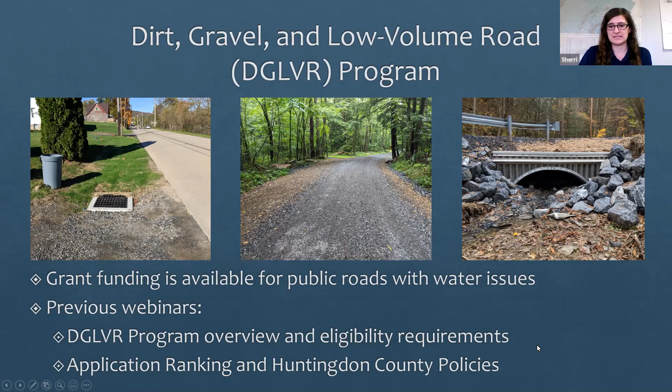To make sure you're eligible for the grant program, again, review that first webinar, basically to attend a training for that. And then eligible applicants will meet with the Conservation District to look at some specific roads and discuss some potential projects. Then applicants submit their application by June 30th of 2021. And then there are 2 separate boards over a couple of months that will rank all of the grant applications and decide which ones are funded each year.

If your project ranks high enough to be funded, you'll sign a contract in late 2021, do the road construction project in 2022, and be reimbursed after construction is completed in 2022. And then next year, you could also apply for another grant and just continue to enjoy your road. So that's the overall process. Since it's spring of 2021, we're in that pre-application phase right now. So again, today's webinar will be talking about specifically how to design road projects and then fill out the grant application. So I want to start with just a brief overview of what the application includes.

Thankfully, it's just 1 short page, front and back. The back of the page is a space to do a sketch of your project. You do have to attach a location map, as well as a cost estimate, which you sometimes can fit on the 1 page, but most folks like to use additional pages to write out the cost estimate with more detail. And a few additional forms that may be needed are a traffic count for the low traffic volume roads to verify they do have that low traffic, and a consent form from landowners for any work outside of the public road right of way. Later in the presentation, I'll go through all of these items in more detail, but just to get started, that's what the application looks like front and back.

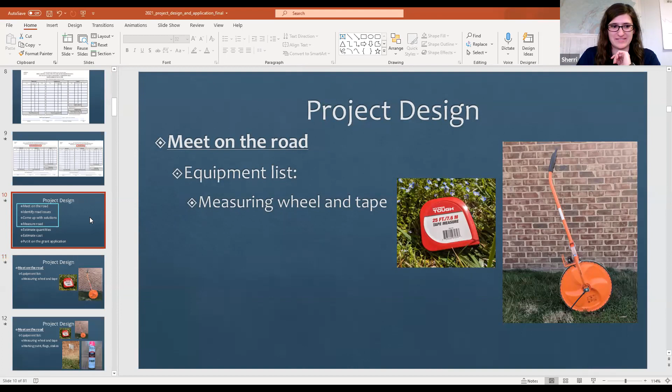Hey everybody, looks like we may have lost Sherri. I'm not sure what happened. If we had a power bump at the office. So just bear with us for a minute. I'm gonna see if we can get her back online. Oh, thank you for the text. Okay, looks like she's back. The internet just turned itself off and it came back on. So I apologize about that. Let's get my email off the screen there. Can you still see my presentation there, Selena? Nope, we don't see the presentation right now. Hit that button again. So sorry, everybody. I guess it was too much to ask to make it through 3 whole weeks without any technical glitches. How about now? Can you see that? Yeah, and I'm not sure where everybody else lost you, but go back. I would go back to the project design. That's where I lost you. Okay, I am sorry about that. We'll redo this slide. Selena, are we still recording? We are. I'll try to clip that out. No problem. All right, so

What I had hoped for you all to hear before was that if you're able to do a good job designing your road projects, it makes putting it on the grant application paperwork a whole lot easier. So this is really what I'm going to be talking about today. So when you're designing a road project, you obviously have to go look at the road, identify the issues on the road, come up with solutions for those problems, and take some measurements.

And I have those all boxed out because those are things I kind of do all at the same time, specifically when I meet with folks at pre-application meetings. Although anyone who has a background in road work or is just more familiar with the grant program can obviously do some of this work on your own. I know some folks like to kind of draft a grant application and then discuss it with me when we meet on the road, and that's fine as well.

Once you gather all that information, you can use it to estimate material quantities for your road project. Once you know what materials you need, you can get a cost estimate, and then putting all of that on the grant application becomes pretty easy. So we'll start at the top here. When we meet on the road, I have a list of equipment I like to take with me, starting with a wheel and a tape measure to make sure we can take measurements on the road.

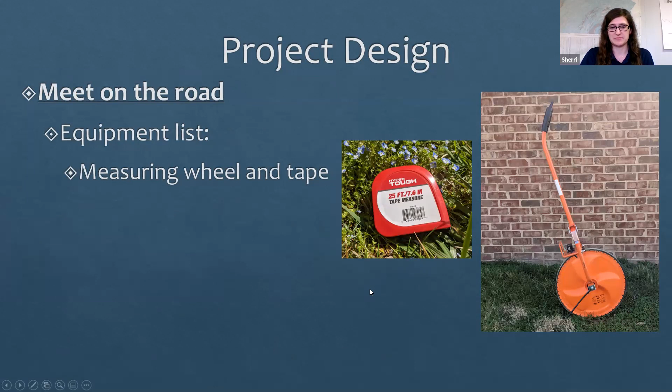I also like to bring along something like marking paint, flags, stakes. These aren't necessarily marks you would make on the road that would last all the way out until you do construction. But if you're going to be going back to the road a few different times as you lay out your project and come up with ideas, it can be useful to mark where you're going to install a new pipe or something like that, especially if you want to remember an area to talk to a landowner about, or me, or something like that.

Definitely have some way to take notes, like a pen, paper, and clipboard. That's the first step, honestly, in doing your grant application. Just taking some notes when you're looking at the road is the first step to putting all of your ideas down on paper, and it will be really helpful to have good notes from your meetings.

And there's also this little environmentally sensitive road maintenance field book. Folks will be attending an ESM training before applying for the grant, and everyone who attends that training will receive one of these booklets, either in person or in the mail, depending on if you attend in person or virtually. And they may be an underused resource, but they have a lot of really helpful information for laying out road projects.

And I don't have a picture of a camera here. I always take photos when I look at road projects, so I remember what they look like and can share those photos with the boards who rank and approve the funding for the projects. But you might want to take pictures in case it rains a lot and you want to see where it's flooding, or if there's groundwater seeping up on your road and it only does that a couple months out of the year. So you remember where things are at and what your road looks like, and that can help you in designing your road project or even talking to landowners.

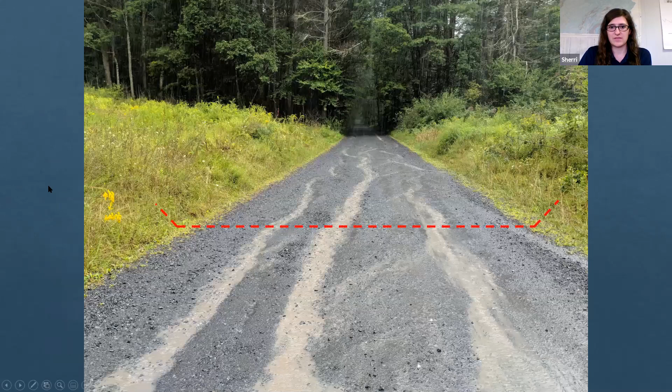I am getting a notification that my internet is unstable, so I hope I don't lose you all again here soon. Can everybody still see and hear me okay? Got a nod and a thumbs up, great.

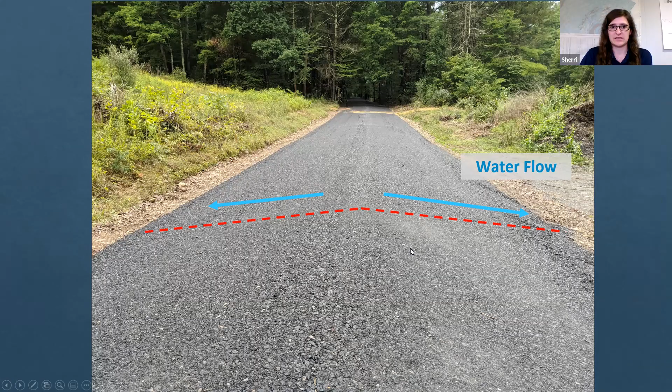Although if you don't have a good spot to build up your road and you just have like a little kind of artificial berm on the downhill side, I apologize, I didn't have a good photo of this, but anytime you plow your road or traffic goes by, some gravel can build up on the edge of the road. And sometimes that's all that's trapping the water on your road. So that's another thing to take notice of, because if you just remove that berm, that can have a similar effect as building up the road in certain circumstances.

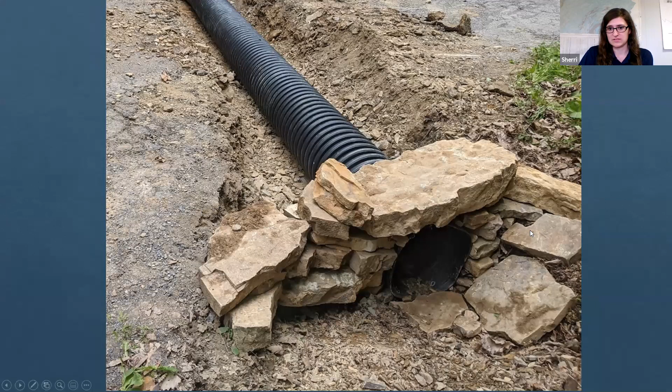If you don't have enough drainage or your pipes are failing, you want to be installing new pipes with some nice headwalls and endwalls like we see here. Underdrain is a great way to deal with groundwater.

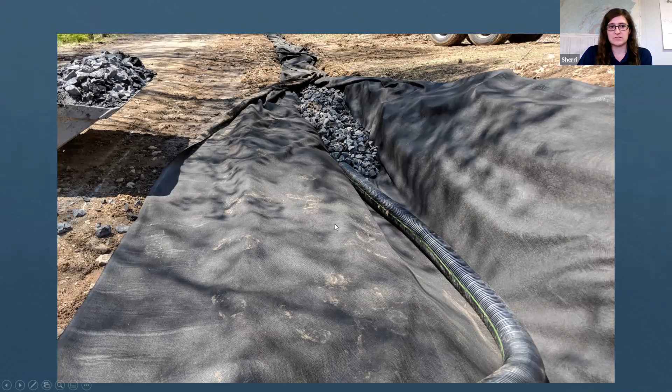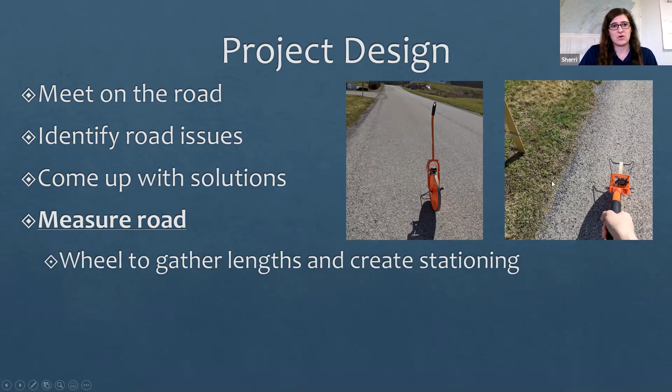Usually every 100 feet is how stationing goes. And then that way, when you're driving down the road, you don't have to start measuring from the one end every time. You can just start at station 2 and know that you're already 200 feet into the project.

This is often written as, instead of 0 feet, 0+00, or instead of 100 feet, 1+00. Because then when you go back and you're putting a pipe in, you know you can start at station 1 and go 20 feet from there. And then that's what 1+20 means, or 20 feet from station 1.

If your project's only 400 feet long, you may not need to do this. But if your project's 2,000 feet long, this can be a really useful way to break it up and remember where different features are going to be. So you can draw in every new pipe that you want to put in, existing features like a stream, where they're at in the length of that.

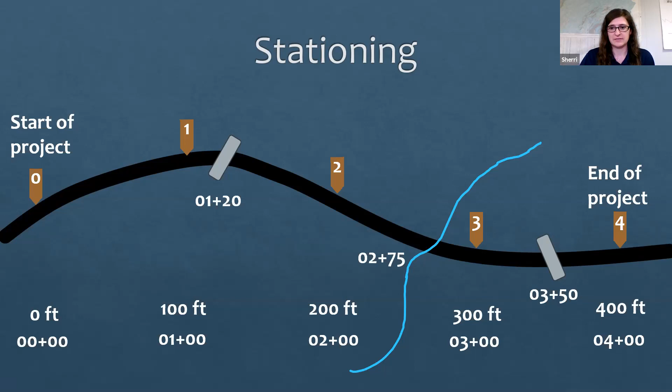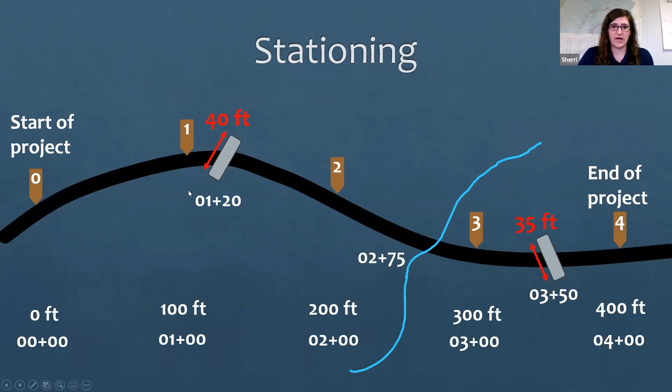Even if you don't want to do stationing, I always recommend a tape measure so we can figure out how big your existing pipes are and how long pipes are, because when you put them in on an angle on the road, you want to know how long they need to be to get across the road and outlet into a stable grassy area. So that's really helpful information, to know how long your pipes are going to be on your road.

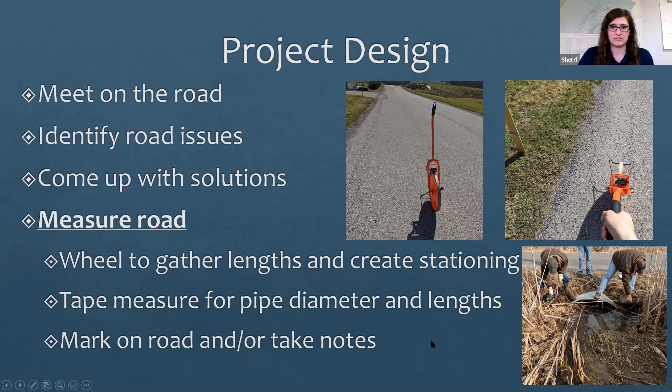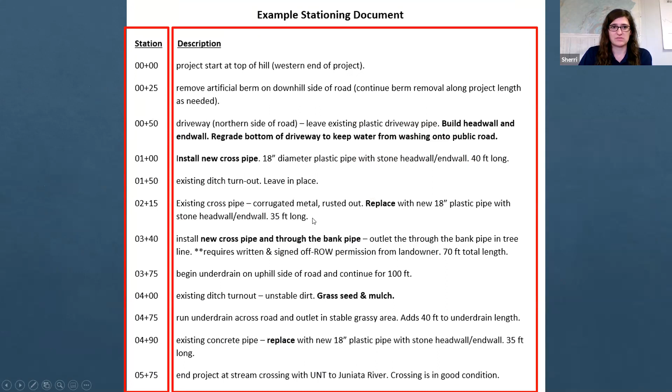And of course, take some notes, whether or not you put any stakes or flags or paint to mark anything. Again, taking notes at this stage when you're on the road talking about design will really help you out. What you can do with your notes is create a stationing document where if you have measured specific distances on your road, just write down, I was 200 feet from the beginning and we talked about putting in a new cross pipe. And when we measured the road, we need to get a pipe 35 feet long to get across the whole road. Just take notes in some way so you can reference that later.

And then when you're referencing those notes, you can use it to estimate your materials. So these are going to be based on those measurements you take out in the field when you're looking at your road, and it does require some math. If you don't like math, please do not panic, because I do have some tips to make this a lot easier on you. Again, if you're thinking right now, Sherri, I don't even know what materials I need to put a pipe in, let alone how to figure out how much I need, there are resources to help you. So don't be afraid to look at that book.

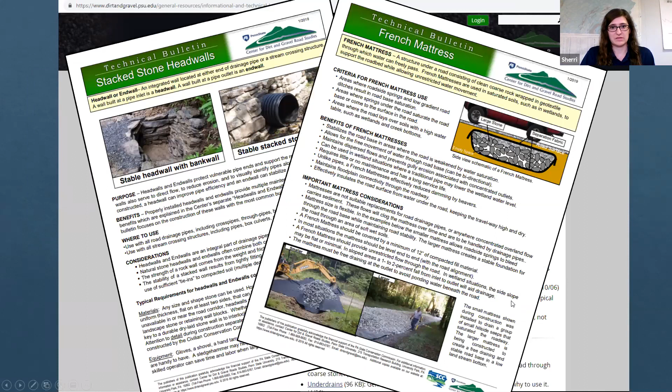And also, if you go back to that Center for Dirt and Gravel Road Studies website, they have a whole page on technical bulletins. Under general resources, it just says technical bulletins. And these are all 1 to 2 page explanations of what a pipe is, how to build it. What's the French mattress? How do you build it? What is driving surface aggregate or DSA? And how do you plan for it?

And so if you're struggling with that, these 1 to 2 page little technical bulletins can really give you a list of materials that you can work with when you're trying to figure out what you need to build your road. And honestly, I always have these printed out with me. When we meet, I'll probably give you a couple of these, depending on what we've talked about.

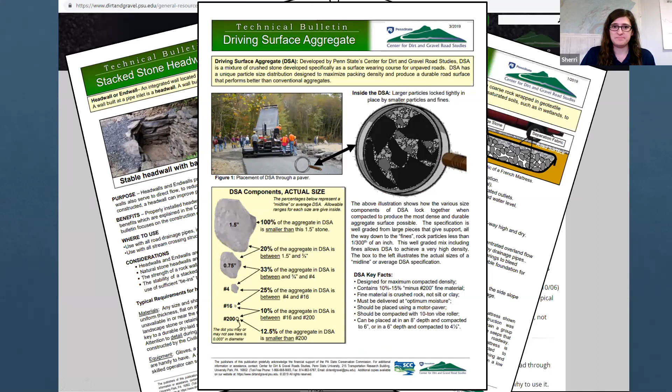So now you take your notes and you make a materials list. So if you want to figure out how many feet of cross pipe to buy, I go back to my list and I count up how many cross pipes we talked about. And hopefully you took notes on how long each cross pipe needs to be and you add it up. 40 feet plus 35 feet plus 35 feet. For this example project that I completely made up, you need 110 feet of 18-inch diameter smooth bore plastic pipe. That's kind of the standard folks use for road drainage.

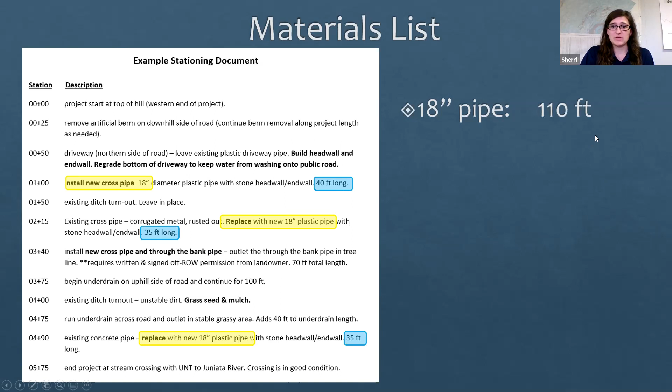But when you build a pipe, you need more than just the pipe itself, right? You saw in the photo, we build head walls and end walls out of stones very frequently. So you want to make sure you are buying stone to put around the ends of your pipe. And you do have to backfill those pipes with some fresh gravel, such as PennDOT 2A, to make sure that the road is stable and safe and that pipe doesn't collapse under the weight of traffic. And that's another thing that can be tricky.

How do you know how much stone you need to backfill a pipe? Well, thankfully, most components of roads, including the surface of a road, are really just a rectangle. So if you think about burying a pipe in the ground, you can just think of the trench you buried it in as a box around it. And if you figure out the volume of that box, you can estimate how much stone you need to fill it up. So that's just multiplying the length, the width, and the height, or the depth.

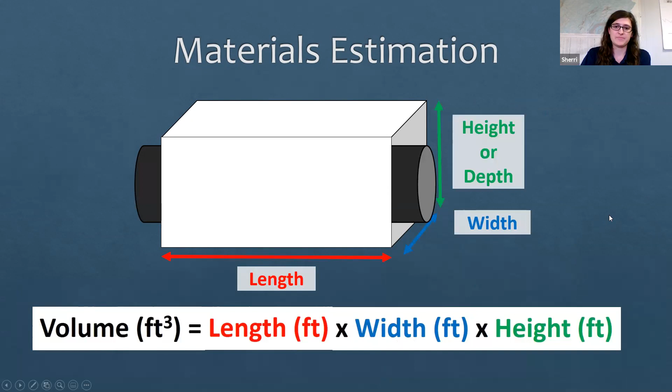So looking at a few pictures, if you already know that your pipe's going to be 40 feet long and 18 inches wide, just budget a little extra space on either side so you can compact it with a jumping jack or vibratory plate, something like that. Think about how deep you want to bury that pipe. Getting those numbers, you can calculate how much stone you need.

This doesn't have to be to the inch. Obviously, this is all an estimate. This can change a little bit by the time you actually go to construction. Once you start digging, you're never going to know exactly what depth your trench will be a whole year in advance. But just this way of thinking about it can really help you estimate that.

Now, another problem some of you may have noticed is that you don't typically buy cubic feet of stone. You might buy it by a cubic yard, but more often you're probably going to be buying stone by the ton. And so there are some simple calculations you can do by hand to convert that volume into a more usable number. But honestly, there's a much easier way than doing all of this by hand.

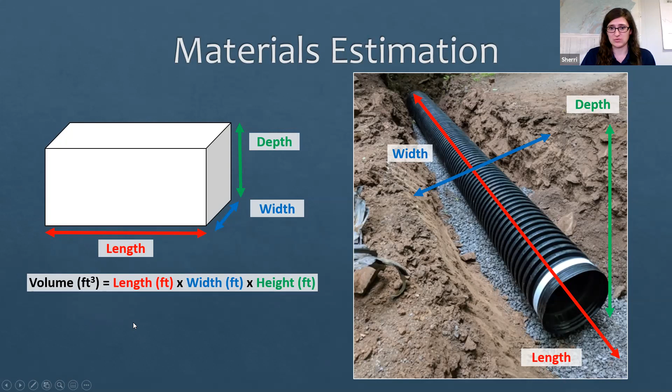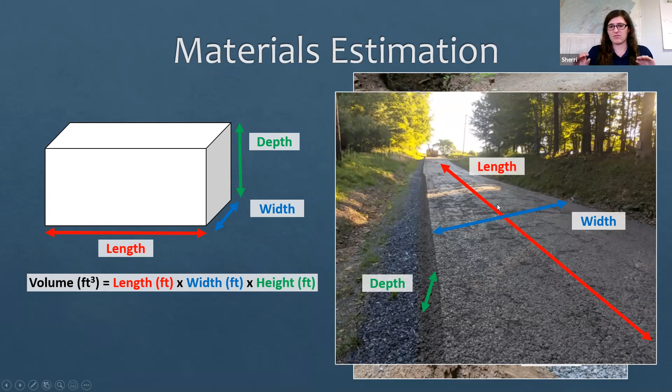Oh, there's another example. The surface of a road, when you're building up the road base or placing DSA, it's kind of the same thing. It's just a long, flat rectangle. So you need a length, a width, and a depth there as well. And so Penn State has a materials calculator on their website. You can find it in the same area of their website as the technical bulletin.

And so here's the web page. When you scroll down, there's honestly just boxes for length, width, and depth. If you have taken those measurements on your road, you just fill them in here. Pick what kind of stone you're talking about, hit this magic green button and it gives you answers. So if you have a 500-foot section of road, the driving surface is 16 feet wide, and you want to place 6 inches of DSA, it'll tell you exactly how many cubic yards and tons you need.

And if you happen to know how much you pay per ton for DSA and put that number in here, it even spits out that's going to cost you $6,111, and you can put that number directly into your grant application. So you can use this to estimate backfilling a pipe, an underdrain, a French mattress, building up a road base, driving surface aggregate. If you really just focus on those length, width, and depth measurements and use this tool, it'll help you out a lot.

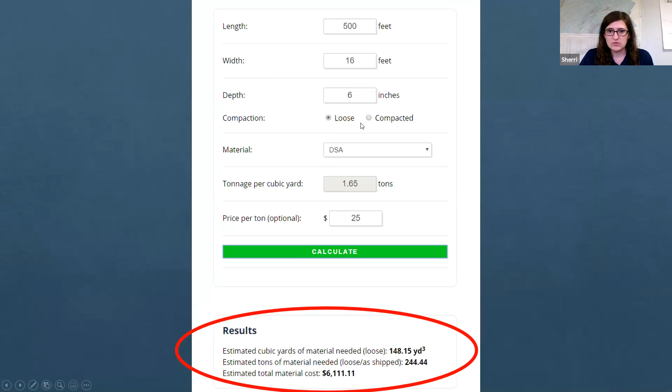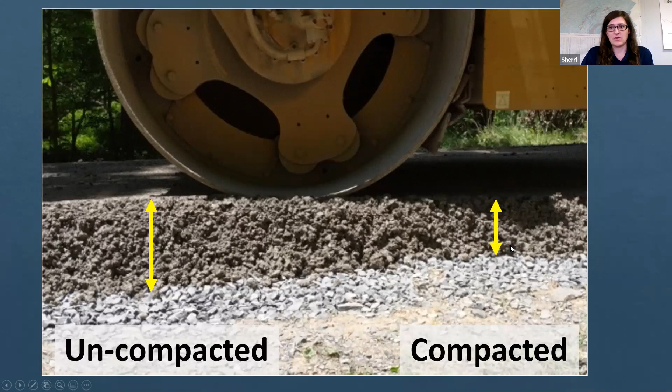You might have also noticed there's a loose or compacted option here. When you're putting in 2A, 2RC, DSA, any kind of aggregate around a pipe or on the surface of a road, it will compact, and you want it to compact because that will give your road strength and support traffic. So you just need to know if you want it to be 6 inches before you compact it or after you compact it, and make sure you're picking that option in the little calculator there.

So those are some considerations that can help you with materials estimation. What I would do is just go through all my notes and do that for every item. Figure out what materials you need for your pipes, for your underdrain, for your French mattress, for whatever it is you're building on your road. And that's how you can create a materials list.

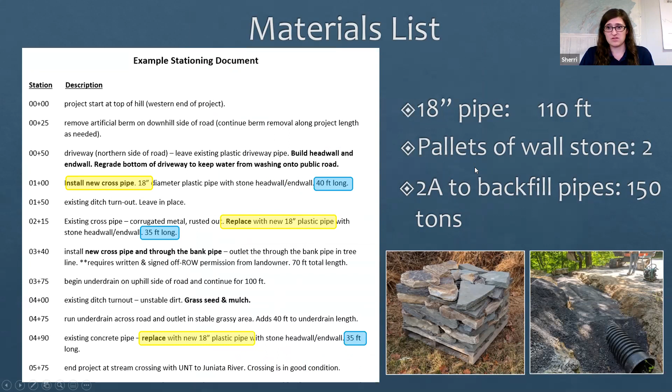Okay, so talking along then, estimating quantities is one of the hardest parts for people. And again, I'm available to help with that at the Conservation District. And once you have that, cost estimate isn't quite so difficult.

Unfortunately, that is an area that I can offer the least assistance with, just because I don't know how much you pay for things. I always recommend people use their past or current costs when they're buying stone or pipe or any materials, because you know best how much it costs. And you know if you have to pay for it to be delivered, or if you have to pay someone to drive your township truck, for example, over to pick up the material.

You know, quarries will deliver stone to municipal buildings or directly to a construction site. And any section of road you have materials delivered to will have a different delivery cost with it. And so at a certain point with the cost estimate, that's really up to the individual applicant to figure out how you plan to get materials onto your site, how you plan to get them installed, and figure out what works for you in the best way to have that happen.

If any of you are thinking, I don't buy that stuff, we don't do a lot of big road work, we'd have to hire a contractor, then I recommend you talk to a contractor at this point in your project design. You know, show them your notes, your stationing, take them out to the road and talk about what you want to do and say, how much would it cost for you to do this project? And make sure they understand that's different than a bid.

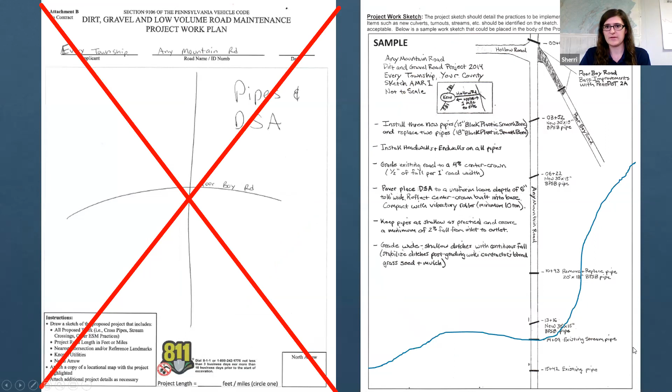Some tips on putting together a good sketch like this are to show the approximate location, shape, and size of the road. So if it's a straight road, draw a straight line. If it's a curvy road, draw it curvy. If the intersection is T-shaped, make it a T. And if it's not, just try to mimic something that's close to what it actually looks like. Draw in all of your project features so we know how many cross pipes or French mattresses or underdrains you're doing. And I know it's probably too small to read, but I'm sure you can tell there's words here.

If you're not an artist, please don't stress about this. You know, you can just draw a couple of straight lines and then write some notes. So this says that you're installing 3 new cross pipes and replacing 2 cross pipes. And you're saying what size those pipes are. Then you're saying you're installing headwalls and endwalls on all the pipes. You can actually just write some notes on there if that's helpful or easier for you.

So existing features like streams, landmarks can be really helpful. You know, if there's like a big tree in the middle of the road project, or there's only one mailbox, and that's where you're going to install a French mattress, just drawing something like that on there so I know, okay, there's 2 pipes on this side of the big tree and 3 pipes on that side. That can be really helpful too. And if you are going to be applying for grant money for anything outside the public road right of way, just show us which parts are in the public right of way and outside onto private property. That could be great as well.

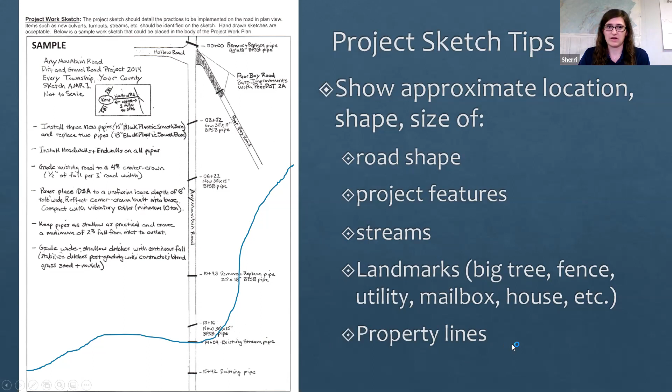Cost estimate, again, is probably one of the hardest parts for people. So I'm going to just briefly talk about how to fill out this additional form if you choose to use it. So zooming in on the materials list here, you've already made your materials list when planning your project. So now you just have to fill it in.

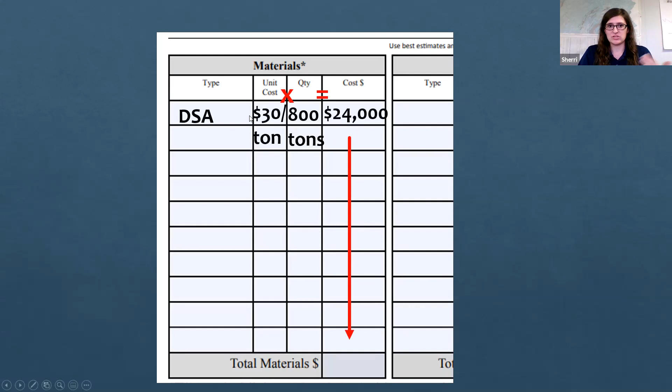So for example, if you're putting driving surface aggregate on your road, you've already calculated you need 800 tons for your specific length, width, and depth of your project. Now you just have to know how much that costs per ton. And when you multiply those numbers together, you get a total cost of $24,000 in this little example for your 800 tons of DSA. And you can just fill in every material line item on there. Once you have the quantities, get prices for all of them and add it up at the bottom.

And then on the sheet, you repeat that process for equipment and labor, and you can add all those numbers together to get your total grant request. There is a box here that was added just in the last couple of years for engineering. You can use up to 10% of dirt, gravel, and low volume road grants for engineering costs that are incurred after a contract is signed. So if there happens to be an engineer helping with a grant application, the time they spend preparing this is not eligible for reimbursement with the grant. But if you need a permit, for example, and need an engineer to put together a permit application once you have your grant, you can use some of your grant money to help pay for that.

So for example, if your materials, equipment, and labor all added up to $50,000, that means up to $5,000 of that grant could be used to pay for engineering, but you've already budgeted all that money for materials, equipment, and labor. So what you really need to do is add $5,000 into this box and add that in. Then at the bottom of the sheet, just total it all up, and that's how you get the numbers to put onto the front of your grant application there.

And again, these sheets are optional. They are really helpful, especially if you are a township, for example, that has your own road crew. So you know how much you pay your laborers, you know what equipment you have or need to rent, and then you really just need to have a good materials estimate. And you can break this out into what you're requesting the grant to pay for and what you might be paying for in kind. A lot of times in the township example I just gave, maybe your road crew and your equipment use is what you're paying for in kind. So you just fill out these two sections of the form. And then on the grant form, you're just asking for money for materials.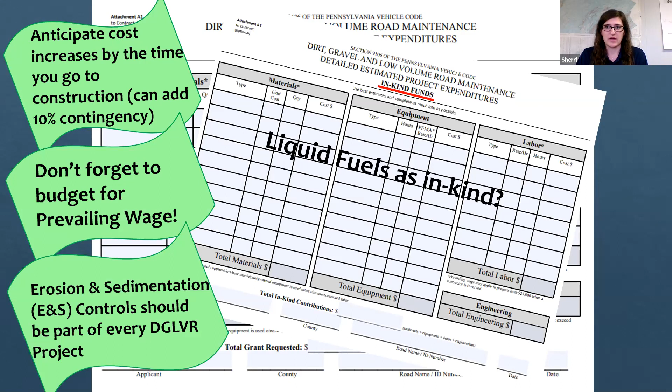Often you could just add 10% at the end and kind of increase everything a little bit. Don't forget to budget for prevailing wages if that applies to your project, which I'll talk about next. And also don't forget to budget for some erosion and sedimentation controls, because every project will need some of those, but hopefully not many.

So prevailing wage, basically, if your total project costs more than $25,000 and there are any contractors completing any part of the project, they do have to follow prevailing wages. And there's a whole frequently asked questions document about this, so I won't spend a lot of time on it today, but I did just want to mention that because this is the time when you're planning your project that you should be thinking about this if you have contractors as a part of your project.

And so when you look at the front of the sheet here, the grant request in this example is $24,775, less than $25,000. However, the total project value of $28,000 is over the $25,000 threshold, and that's the number we go by. So do fill out this little box and take a look at that before you send me your application to make sure that if that's over $25,000 for the total project value, and if you think you need contractors, should you get funding for the project, that you've budgeted for that.

And honestly, that's as simple as when you ask a contractor for a cost estimate, tell them it would be a prevailing wage job and they'll factor that in. The wages vary by job, but they're usually $50 to $60 an hour in this part of Pennsylvania in the last few years. And so if you happen to know how many hours they'll spend on the job, you can do that math yourself. But again, if you just let them know you need a quote that includes prevailing wages, they will more than likely be able to do that.

E&S controls, we always need to think about them anytime we're doing any kind of construction or earth disturbance. That's a legal requirement. Thankfully, dirt and gravel road projects basically are erosion controls because the whole point is to reduce road erosion. We're preventing your roads from washing out by improving them. So there's a lot of really simple things we can do to prevent extra erosion when we're doing these road projects, like not working when it's raining.

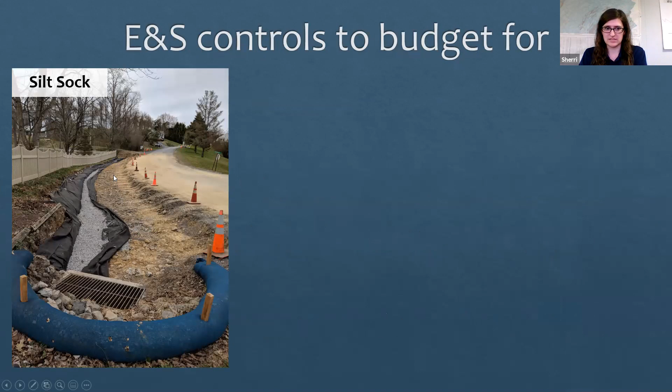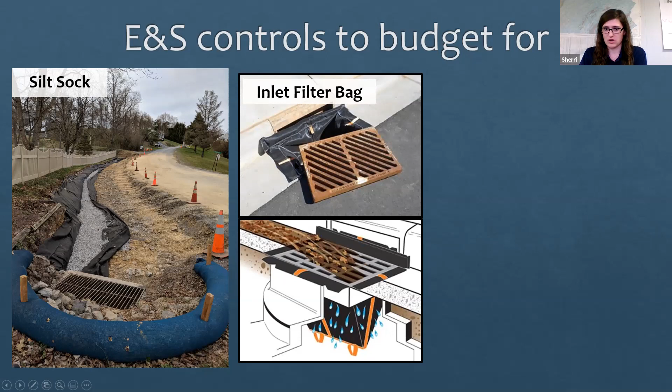Some things you might need to include in your cost estimate is silt sock, again, if you have loose disturbed earth, like a roadside ditch, and you have to leave it overnight before you get grass seed on there. Storm sewer boxes like this will need an inlet filter bag to catch any extra dirt that might wash off into them. And if you are working in a stream, say this is a culvert where the stream and road cross that you're replacing, you'll have to dam up the water above it and pump it around, which makes sense anyway, because you don't need a stream going through your construction site. That's going to make it really hard to work. So you just need a budget to rent some pumps or build a sandbag dike there or something like that.

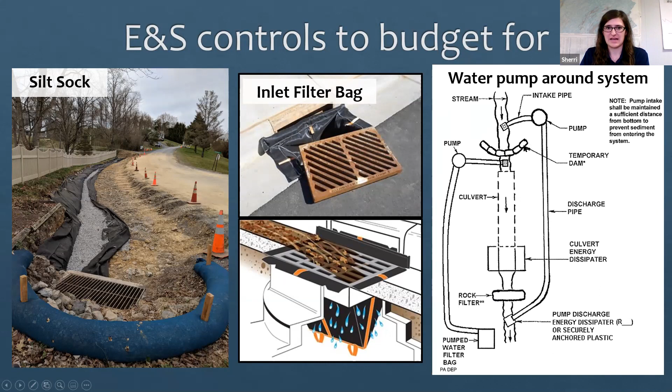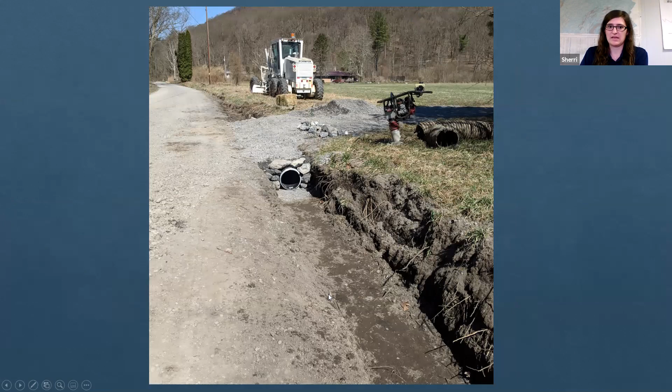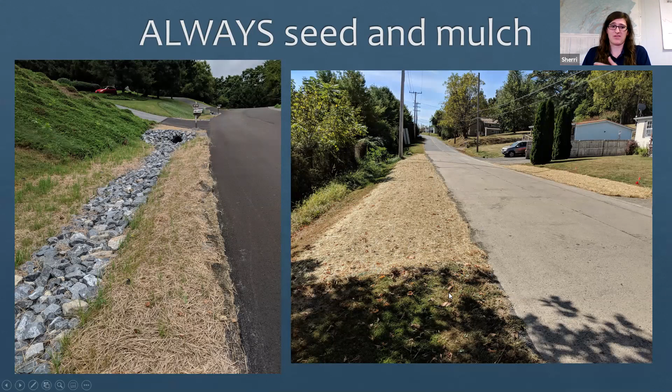The number one erosion control we should all be planning for is grass seed and mulch. Because if we don't get grass growing in this ditch, that's loose. That'll wash away, and now you have a big, unsafe, messy, muddy roadside ditch to worry about, and that's the opposite of what we want. So just budget for some grass seed and some straw mulch. On the right side of the screen, you can see some blanketing they rolled out there. You can even get a straw mat blanket with grass seeds incorporated into it and just roll that out.

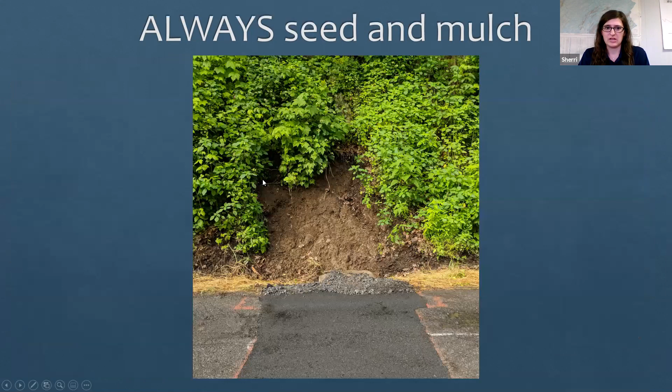Even if you don't think you need grass seed and mulch, you might need a little bit around new pipes or something like that. So just budget for it. You know, if you get into the bank and rip off the vegetation there, you want it to regrow. And that's a great area also to use that blanketing where it's really steep. If you throw some grass seed and mulch, it'll fall right off. That blanket will hold it in place.

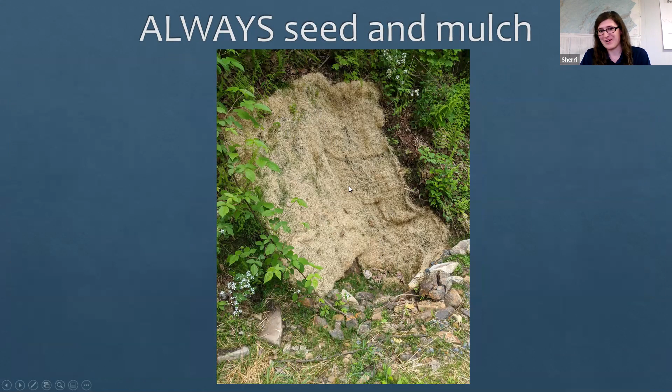So just make sure you have that incorporated in your grant application as well. And that's everything I have to say today on the cost estimate. The last two parts here will go by pretty quick. Helena, we didn't have any questions come in?

Okay. So if you're applying for low volume road money, you do need to submit a traffic count with your grant application to prove that it has low traffic volume. Low traffic volume is considered less than 500 vehicles over a 24-hour average period. And so the level 1 traffic count most people do on this form here is you sit by the road for 2 hours and you multiply how many cars drive by in 2 hours by 12, and that gives you an estimate over 24 hours.

The vast majority of grant applications use this method and have way less than 500 vehicles in their estimate, and so that's usually good enough. If you do have access to a traffic counter though, or if you think you'll be close to 500 vehicles and you want a more accurate count, you can use one of the automatic traffic counters. That usually consists of like an air-filled tube connected to an electronic box that every time a car drives over it, it will automatically count it. And you can leave it there for 24 or 48 hours and get a more accurate count.

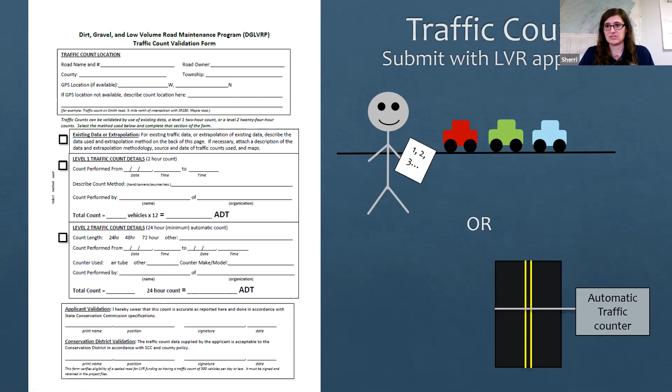Either way, just sign off on the bottom of the form, whoever completes that traffic count, and make sure you follow the directions. For the level 1 count, there are specific times of year, times of the week, and times of the day that you have to sit there and do your traffic count. So I hate to tell you to go do it again if you did it on a Friday instead of a Tuesday. So just make sure you're looking at the directions that come with that form when you get there.

And the last thing is that landowner consent for any work outside the public road right of way. We do offer this fill in the blank form. This specific form isn't required. So if anybody out there has their own paperwork you prefer to use, that's fine. As long as there is a written and signed something agreeing between the road owner and the private landowner, who is installing the feature, who is paying for it, who is maintaining that.

I really recommend having all of that in writing anytime you're helping put a driveway pipe in that maybe is just on the edge of the right of way, but might be on a private driveway. It's good to have that clearly stated in writing, who's paying for it and maintaining it long-term anyway. And so with the grant program, we do require you get that and submit it with your grant application. Because if you're applying for money to do something outside of your public right of way, we need to make sure we have permission before we fund that. So usually we ask for that with the grant application.

And that's everything. If you need help, I do provide a checklist that is just a 1-page summarizing some of the things we talked about today that you can go through and make sure, oh yeah, I forgot my location map, let me get that and now check it off my list. So use that and just contact us. Like I said, the Conservation District is available to help with every single step of this process. I know today I did not give you enough information to design every single type of road project out there. That would take hours. I'm not going to make you sit through that, but hopefully this is enough information to really get you started and thinking about how you need to be doing these projects.